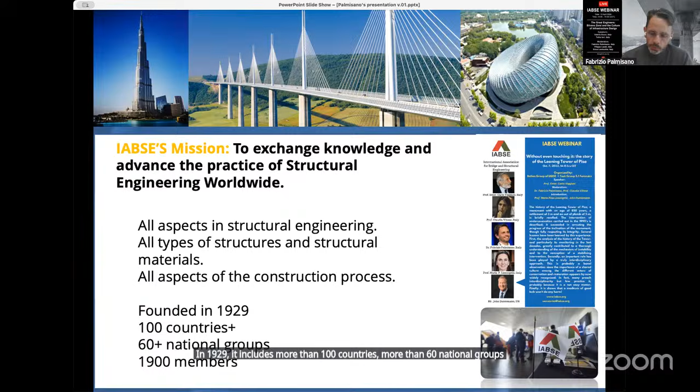The IABSE mission is to exchange knowledge and advance the practice of structural engineering worldwide. It covers all aspects in structural engineering, all types of structures and structural material, all aspects of the construction process. It was founded in 1929. It includes more than 100 countries, more than 60 national groups, and almost 2,000 members. The objectives are to promote cooperation and understanding among all those concerned with structural engineering and related fields by worldwide exchange of knowledge and experience, to encourage awareness and responsibility of structural engineers towards societal needs, to encourage action necessary for progress in structural engineering, and to improve and foster cooperation between organizations having similar objects.

The core, I would say, of the IABSE are the national groups, who are very active and give people and experts for all the IABSE activities. The Italian group of IABSE is new because it has been refounded almost 3 years ago. The basic activities are technical task groups to discuss specific topics, dissemination activities, for example papers in Structural Engineering International, the journal of IABSE, IABSE bulletins, workshops, special sessions at IABSE conferences, and also training activities. We have organized, as today, some webinars. We aim also to organize some short courses. We have already organized one conference in Milan 2 years ago, and we are also planning to organize a huge conference in Milan in 2027.

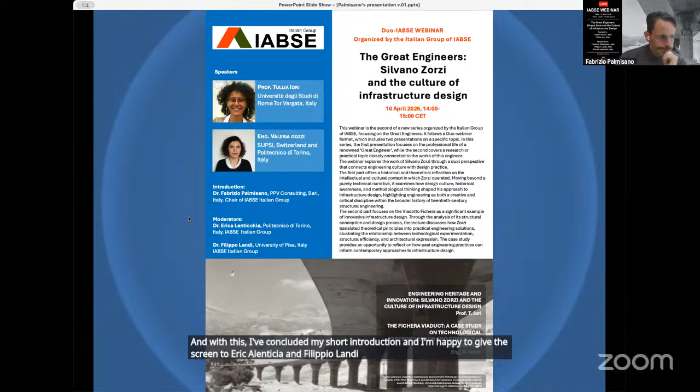Good afternoon, and welcome also from my side. As Fabrizio told you, today our focus is on Silvano Zorzi, a great engineer of the 20th century, through a dual perspective that connects engineering culture with the design practice. To guide us through this dual perspective, we are joined by two prominent speakers, engineer Valeria Gozzi and Professor Tullia Iori. We are honored to have them with us.

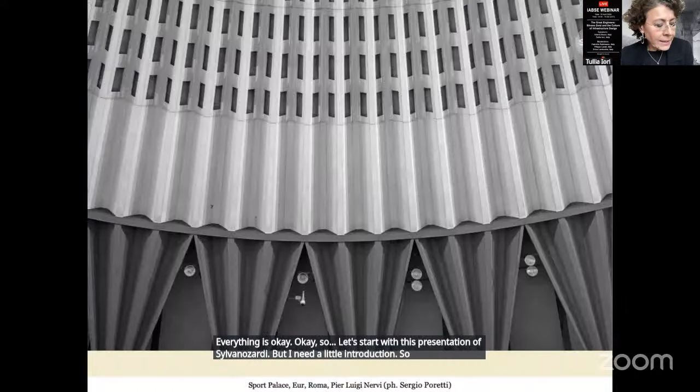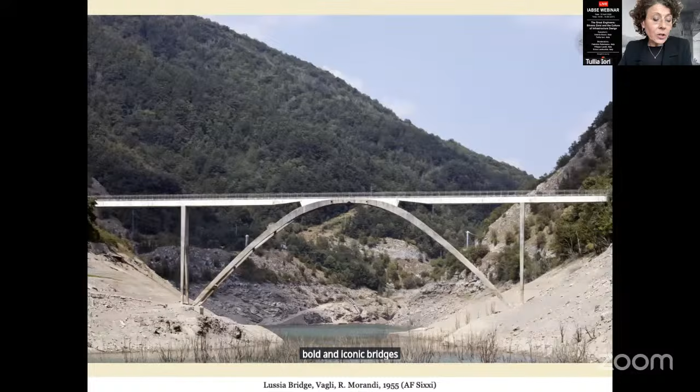So let's start with this presentation of Silvano Zorzi, but I need a little introduction. At the beginning of the 1960s, the Italian School of Engineering was at the height of its success. Represented by designers such as Pier Luigi Nervi and Riccardo Morandi, it was recognized worldwide as a benchmark. Nervi's domes, classically beautiful, yet built with just a few centimeters of ferrocement, or Morandi's bold and iconic bridges, were featured in international technical journals and showcased in the famous 1964 New York exhibition dedicated to 20th century engineering, which was full of Italian works.

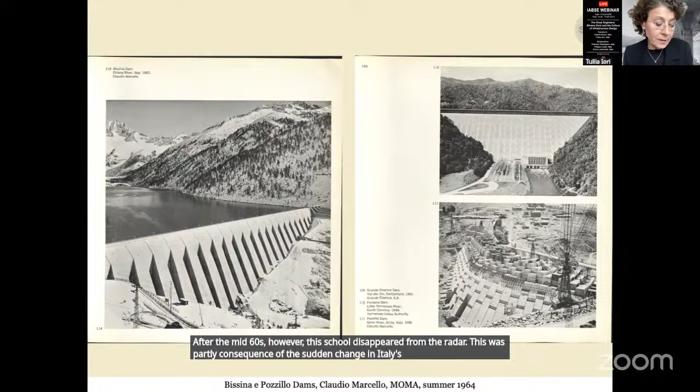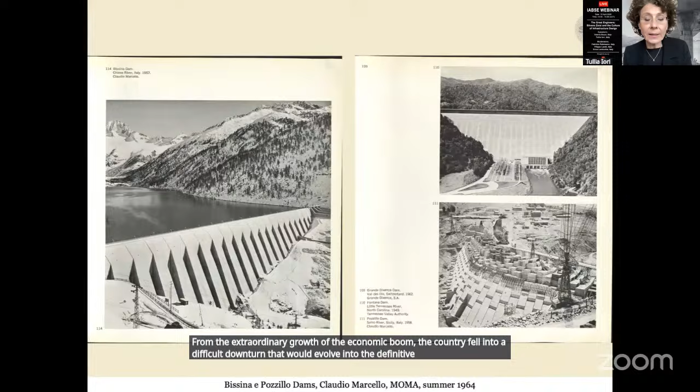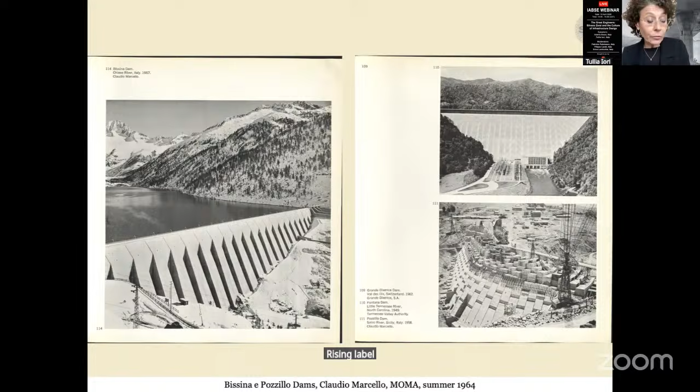After the mid-60s, however, this school disappeared from the radar. This was partly a consequence of the sudden change in Italy's productive conditions. From the extraordinary growth of the economic boom, the country fell into a difficult downturn that would evolve into the definitive crisis of the 1970s. It was also the result of a broader transformation in the civil engineering sector. Rising labor costs, the advent of computing, changes in calculation tools, and increasing specialization led to the extinction of the classical figure of the large structure designer, which had survived in Italy's proto-industrial context.

From that moment on, even in Italy, bridges and large span structures would no longer be the individual work of a single author, but rather the depersonalized product of multidisciplinary teams and standardized construction systems. Yet, even in its rapid and irreversible decline, the Italian School of Engineering left behind across the country a trail of posthumous masterpieces. Among these are the mature works of Silvano Zorzi, who, after playing a leading role in the epic years of post-war reconstruction, remained one of the few to resist the extinction.

How? By refusing to passively accept the leveling effect of specialization and prefabrication, by reworking innovative construction systems for Italian building sites, and by redeeming the simplification of structural schemes imposed by the changing production panorama through the quality of design. It was a kind of utopia, yet one capable of generating structural architectures of extraordinary quality.

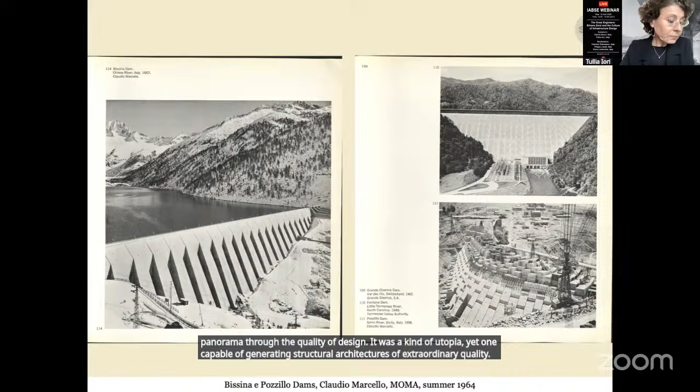Silvano Zorzi was one of the protagonists of 20th century Italian engineering alongside Pier Luigi Nervi, Morandi and Musmeci. A leading expert in prestressed reinforced concrete, he left behind a remarkable legacy of beautiful bridges throughout Italy. Zorzi was born in 1921. Nervi had been born 30 years earlier and Morandi nearly 20. These differences matter.

Zorzi worked entirely in the post-war period, actively participated in reconstruction, and rose to prominence during the economic boom. When the crisis arrived, he had to confront it directly. He was still young, and while the older engineers leveraged their careers abroad, Zorzi had to find a way to continue designing his masterpieces within Italy.

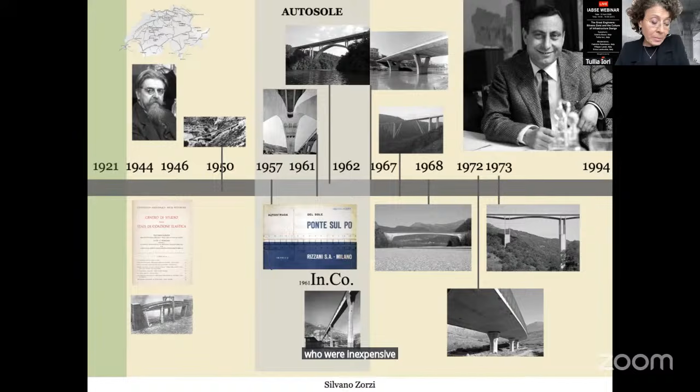These masterpieces were created in a rapidly changing world of labor. At the beginning of his career, construction sites were full of workers who were inexpensive and needed employment. Public works also served to combat unemployment. These were labor-intensive sites with little machinery or technological equipment.

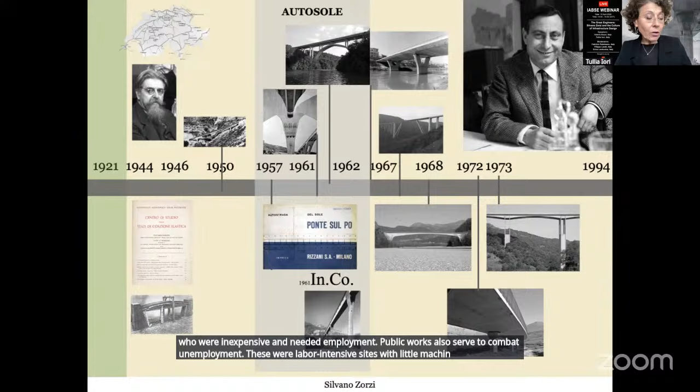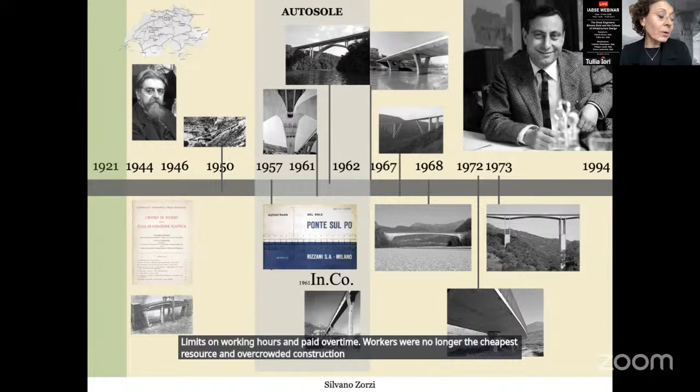From the mid-60s onward, however, labor costs rose rapidly. Trade union demands led the state to introduce pensions, paid holidays, protection for illness and accidents, formal labor contracts, limits on working hours, and paid overtime. Workers were no longer the cheapest resource, and overcrowded construction sites were no longer economically viable. As a result, construction in Italy, especially for large structures, changed, embracing industrialization.

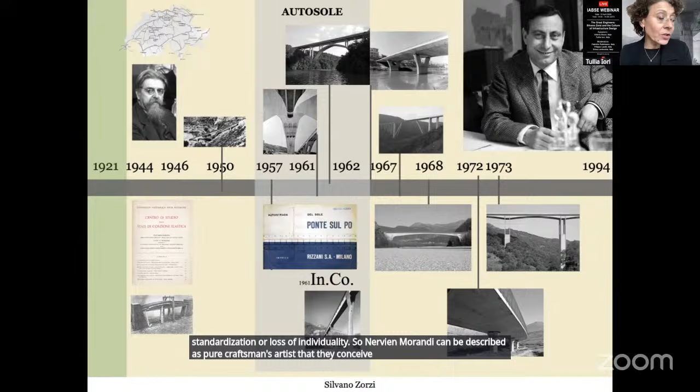Zorzi, however, never abandoned the identity of the Italian school or the originality of his structural language. His was an Italian-style industrialization without standardization or loss of individuality. So, Nervi and Morandi can be described as pure craftsmen, artists. They conceived their structures as large-scale sculptures, unique and unrepeatable.

Zorzi, by contrast, was an industrial designer. He worked like those who design tables, chairs, lamps, and bookcases for industrial production. And this is not surprising. A bridge is more like a table than a house. It's a functional object. Zorzi was the structural designer of Made in Italy, part of that legendary group of industrial designers who from Milan in the 70s rose to global prominence.

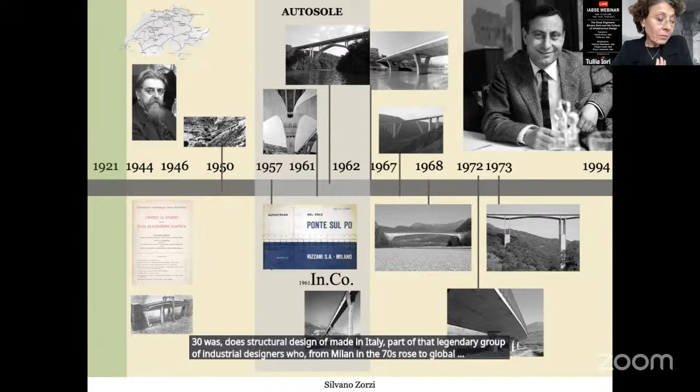Zorzi's beginnings were not easy. In 1939, he enrolled in engineering at the University of Padua, but with the outbreak of World War II, he was forced to abandon his studies. After the armistice of September 8, 1943, he fled to Switzerland to avoid both collaboration with the Fascist Republic of Salò and deportation to Germany. His escape was dramatic. He fell into a ravine, contracted septicemia, but eventually managed to cross the border.

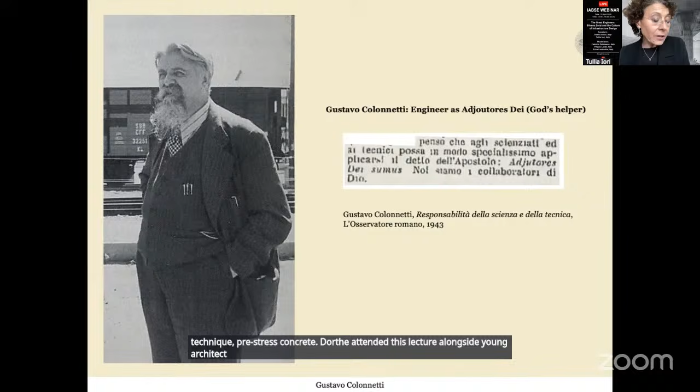In exile, a decisive encounter changed his life. He met Gustavo Colonnetti, also in Switzerland, a renowned anti-fascist and professor of structural mechanics at the Politecnico of Turin. Colonnetti organized university internment camps for refugee students, where he personally taught engineering courses focusing on an innovative technique, pre-stressed concrete. Zorzi attended these lectures alongside young architects and future leading figures in the Milanese industrial design world, such as Vico Magistretti and Angelo Mangiarotti, as well as Ernesto Nathan Rogers and Aldo Favini. They instilled in him a passion for the design of functional objects.

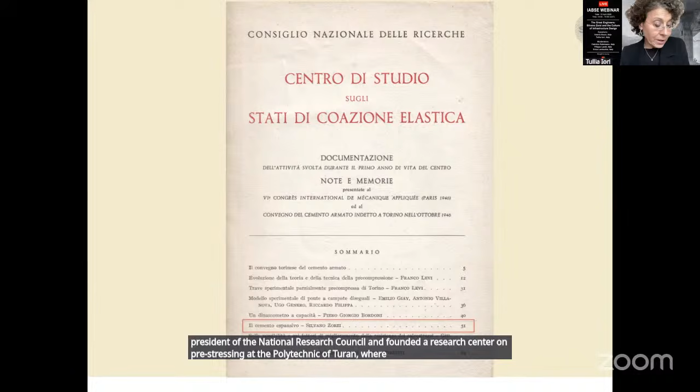Zorzi completed his exams in Switzerland, later recognized by the University of Padua as if he was in Erasmus. After the war, Colonnetti became president of the National Research Council and founded a research center on pre-stressing at the Politecnico of Turin, where Zorzi briefly worked. But he was not suited to laboratory research. He soon left to dedicate himself to bridge design. This Swiss experience shaped him permanently. Pre-stressed concrete and industrial design became the foundation of his thinking.

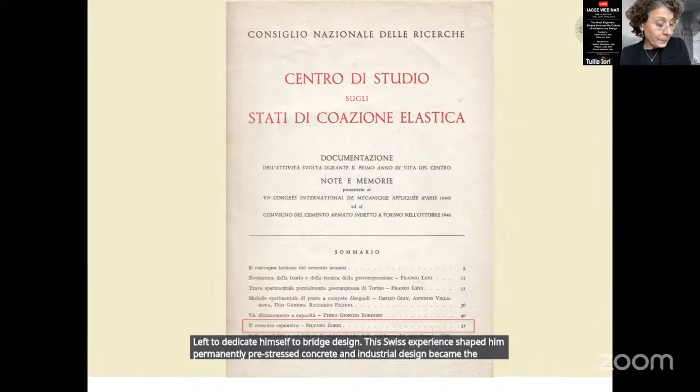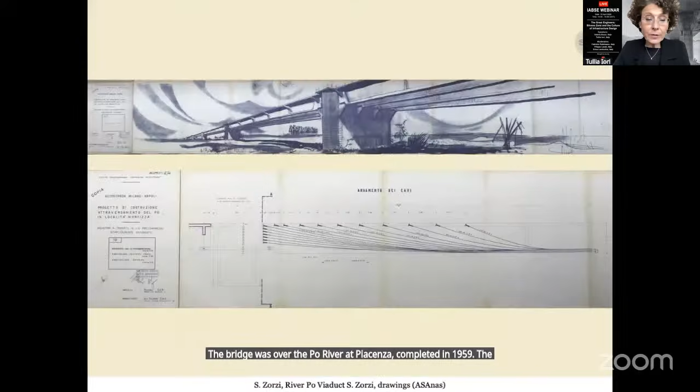Already in 1950, he designed one of the first pre-stressed concrete bridges in the world for the Mucone hydroelectric plant in Calabria. Shortly afterward, he opened his own design firm in Milan, later named INCO, Ingegneri Consulenti, Consultant Engineers. His first major opportunity came when, at age 35, he won the competition for a key bridge on the most important highway in Italy, the Autostrada del Sole, the Sun Highway. The bridge was over the Po River at Piacenza, completed in 1959. The bridge is a very simple structure, 16 pre-stressed concrete beams, simply supported on piers spaced 75 meters apart.

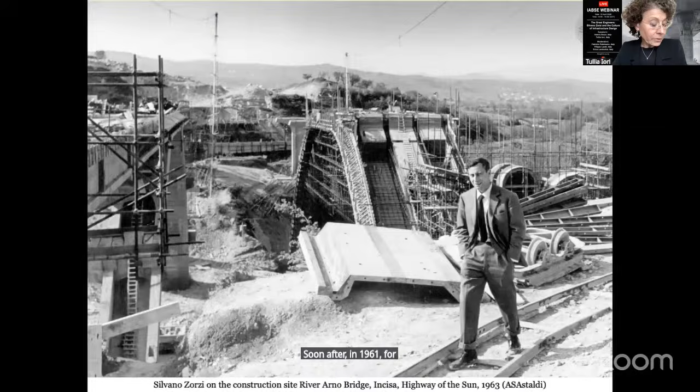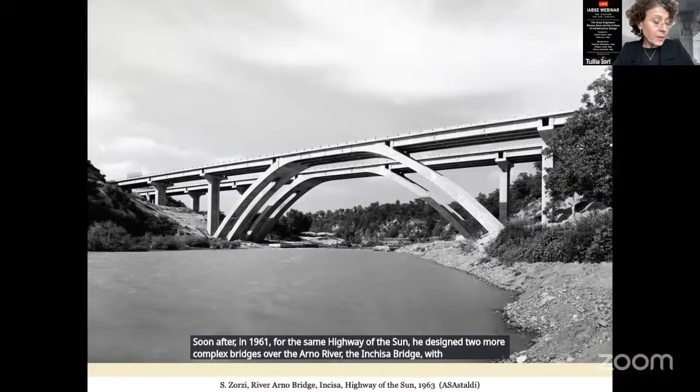Soon after, in 1961, for the same Highway of the Sun, he designed two more complex bridges over the Arno River, the Incisa Bridge, with twin pre-stressed concrete arch portals spanning 104 meters, and the Levane Bridge, a 134-meter polygonal arch, both built with a tubular scaffolding called Innocenti scaffolding.

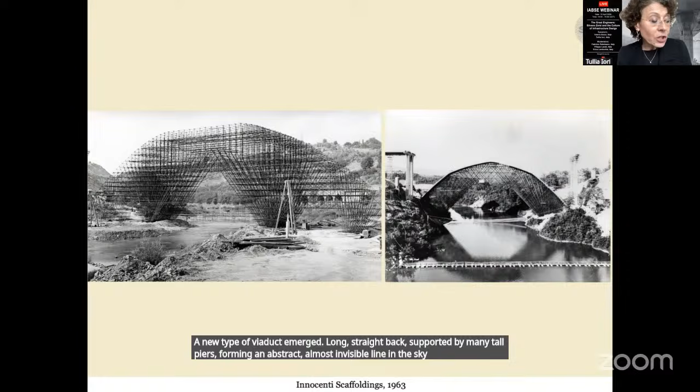The era of large arch bridges in Italy ended after the completion of the Highway of the Sun. After 1964, no such bridges were built for decades. New seismic regulations discouraged trussed structures like arches. Landscape authorities considered them too intrusive, and the cost of temporary scaffolding had become prohibitive. A new type of viaduct emerged, long straight decks supported by many tall piers, forming an abstract, almost invisible line in the sky. Zorzi initially, in fact, continued to design unique bridges.

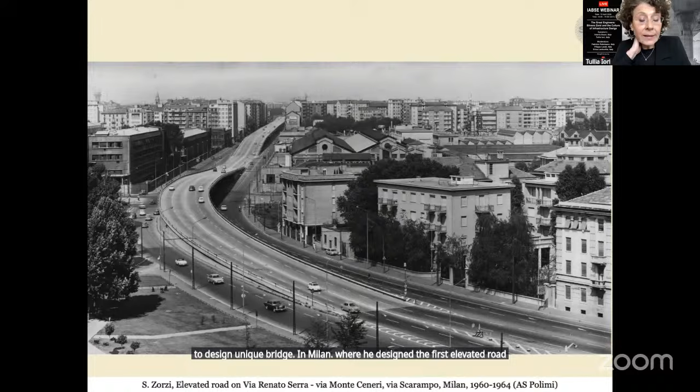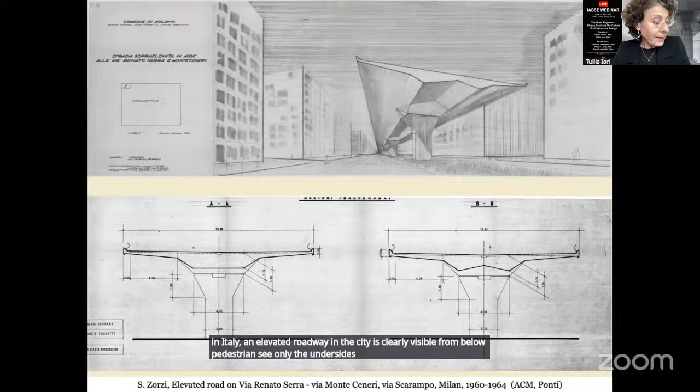In Milan, he designed the first elevated roadway in Italy. An elevated roadway in the city, he said, is clearly visible from below. Pedestrians see only the underside of the deck. Therefore, this underside must be carefully designed, because it effectively becomes a kind of canopy for those walking beneath it.

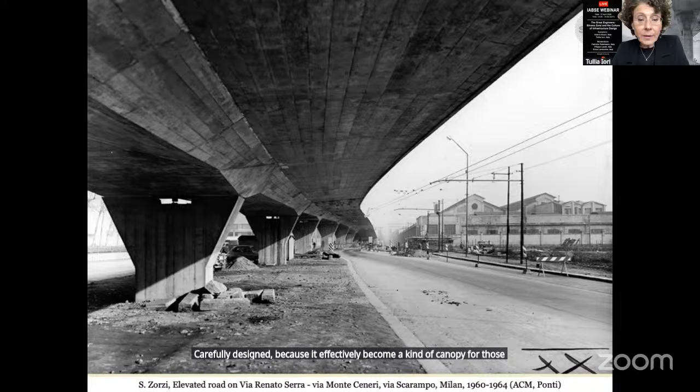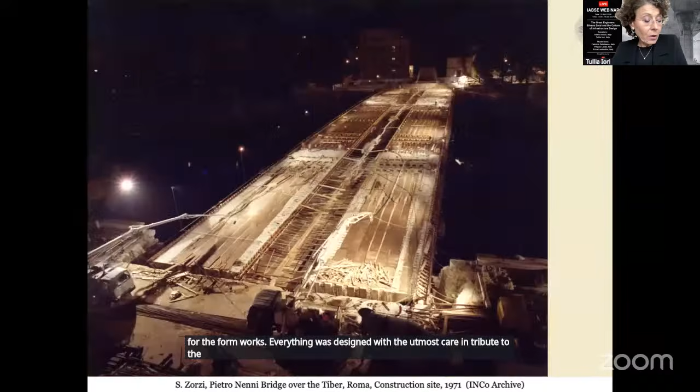In Rome, he designed the bridge carrying the metro line over the Tiber near Piazza del Popolo, completed in 1972. Slender bifurcated piers support a gently curved deck, echoing the Baroque form of the city. White concrete for the piers, marine wood for the formworks. Everything was designed with the utmost care in tribute to the capital and its historic river.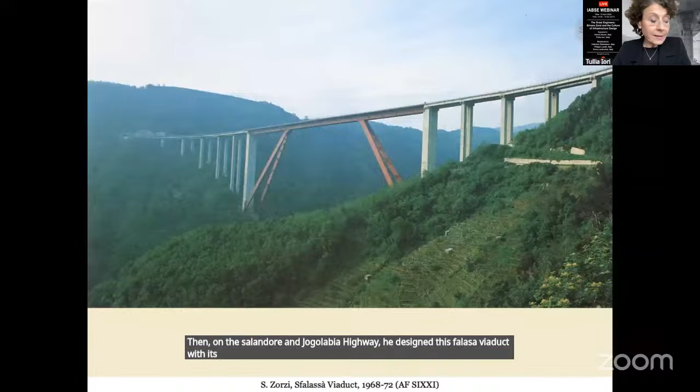Then, on the Salerno-Reggio Calabria highway, he designed the Sfalassa viaduct with its innovative inclined strut portal system in steel. The struts were first constructed vertically and then rotated into position on site using a mechanical system. In this way, temporary supports were not required.

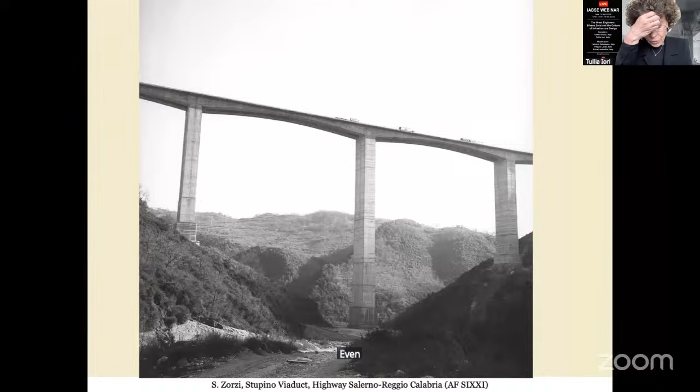But in the end, he too adopted the new typology of bridge: long, straight decks supported by many tall piers. Even with these constraints, Zorzi created masterpieces. He rationalized construction without abandoning cast-in-place concrete. He disliked prefabrication and instead invented a moving construction system that advanced along the bridge. He introduced two key machines in Italy adapted from German technology.

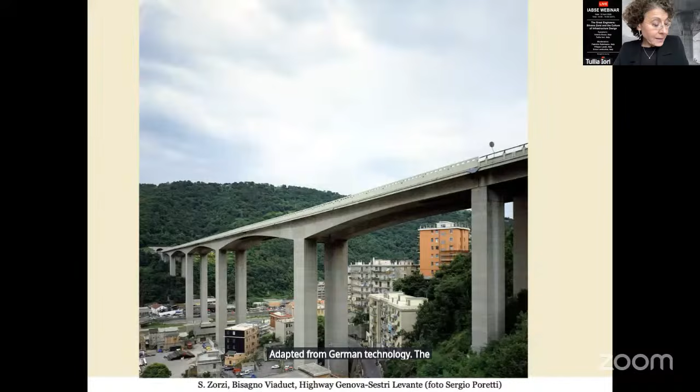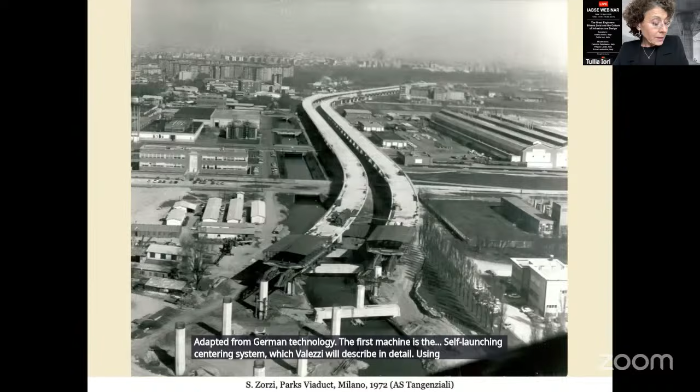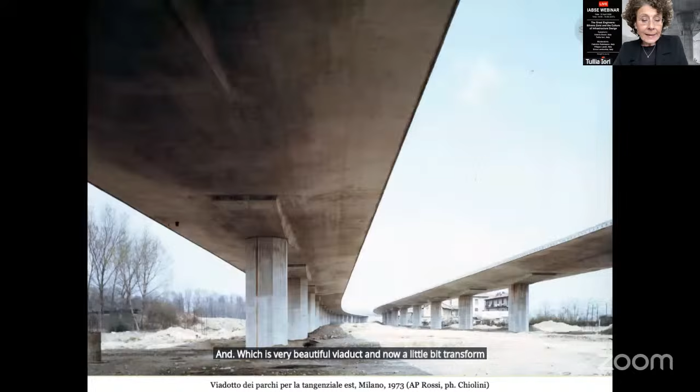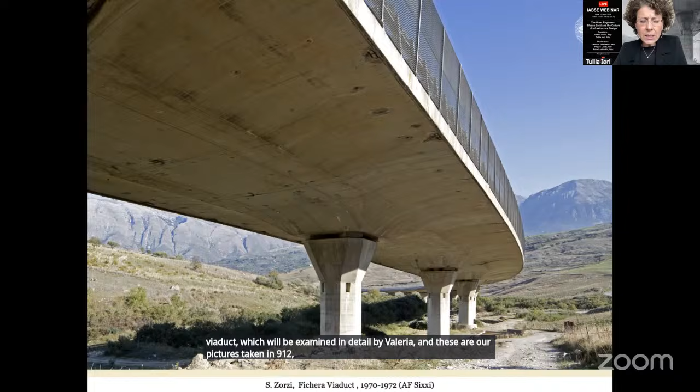The first machine is the self-launching centering system, which Valeria Gozzi will describe in detail. Using this machine, Zorzi built very long viaducts, such as the Parchi Viaduct east of Milan, which is a very beautiful viaduct, now a little bit transformed. And this is Zorzi under the bridge, a beautiful object of design, and the Fichera Viaduct, which will be examined in detail by Valeria. These are our pictures taken in 2015.

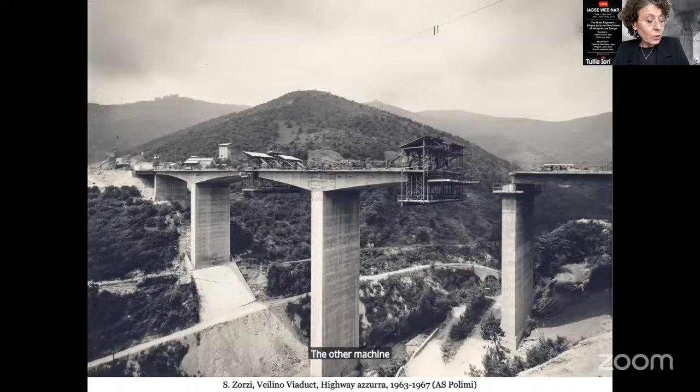The other machine that Zorzi introduced to Italy is the movable form traveller for incremental and step-by-step construction. This machine was used to build a viaduct starting from the top of the pier and proceeding in cantilever. The device extended outward, allowing the construction of a segment of the deck, about 4 meters long, also in cantilever. To avoid deforming the pier, the deck was built symmetrically on both sides. Construction advanced little by little until the two cantilevers eventually met.

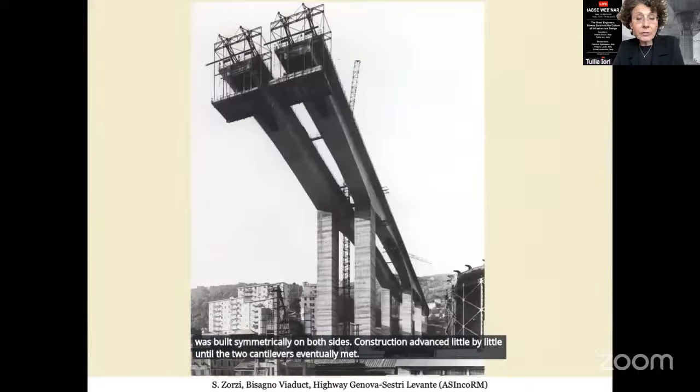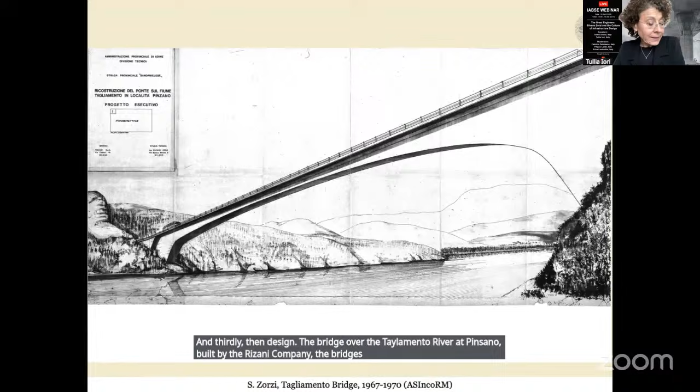Zorzi first adopted the equipment in 1967 for a series of viaducts along the Blue Highway, the Autostrada Azzurra in Liguria from Genoa to Sestri Levante. Zorzi then designed the bridge over the Tagliamento River at Pinzano, built by the Rizzani company. The bridge has a span of 163 meters and consists of a three-hinged portal frame in pre-stressed reinforced concrete.

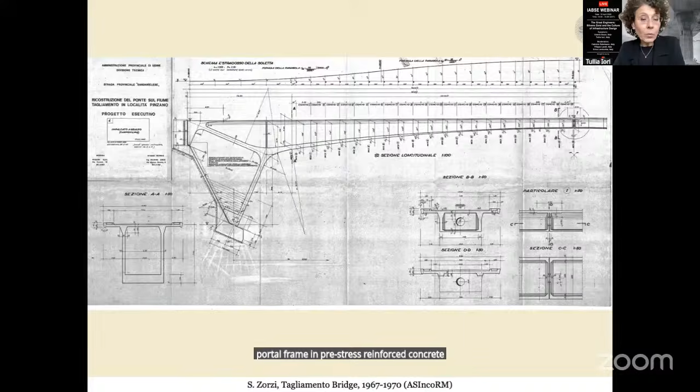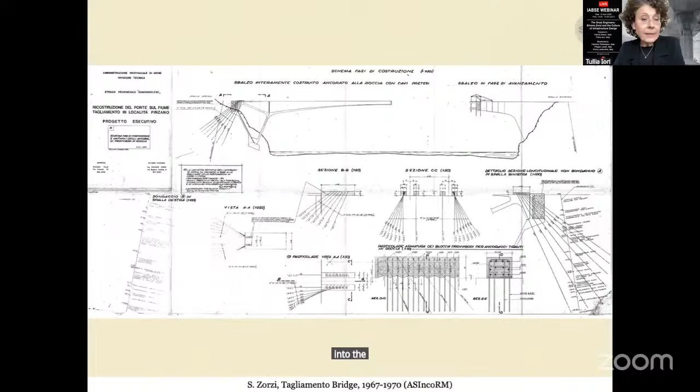The structure was built in cantilever from both banks. The hinges at the abutments were temporarily locked by inserting deep anchor rods into the rock. Segment by segment, the two cantilevers advanced until they met at the crown without bending, thanks to temporary pre-stressing.

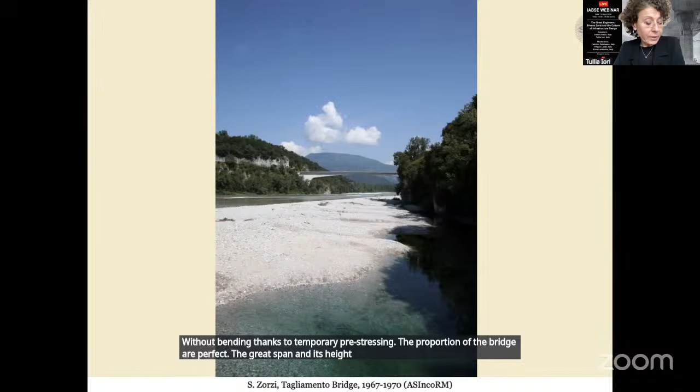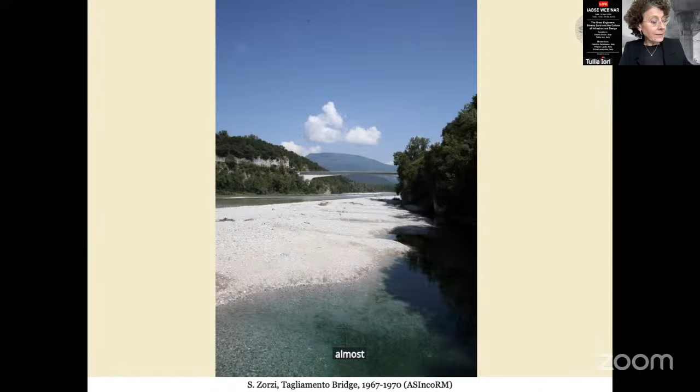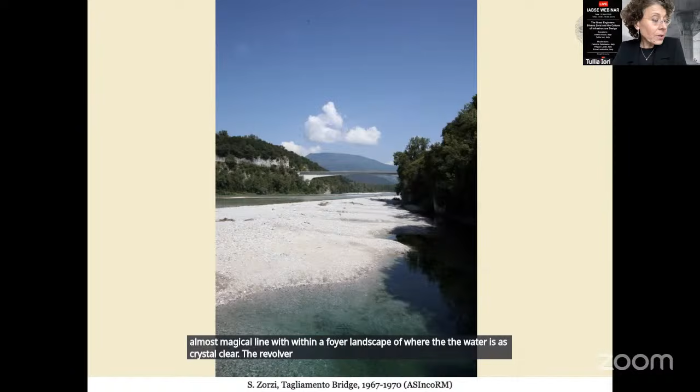The proportions of the bridge are perfect. The great span and its height above the water detach the structure from any direct relationship with human scale. The bridge appears as a slender, almost magical line within a fairy tale landscape where the water is crystal clear, the riverbed has a pinkish hue, and the Dolomites rise in the background.

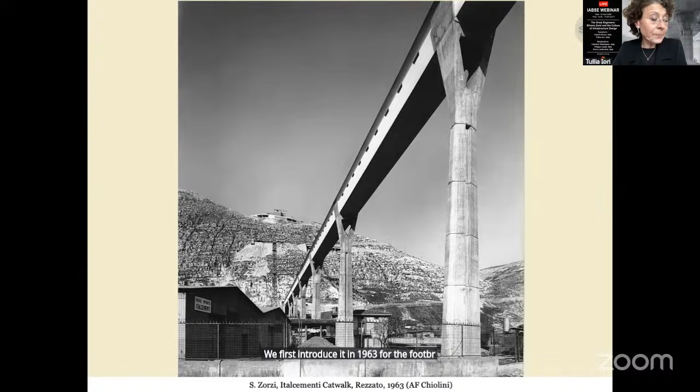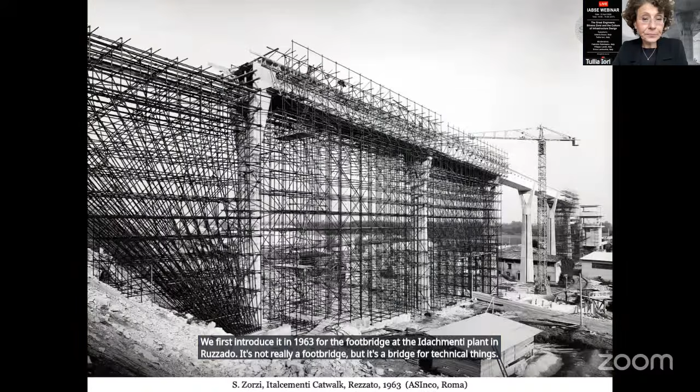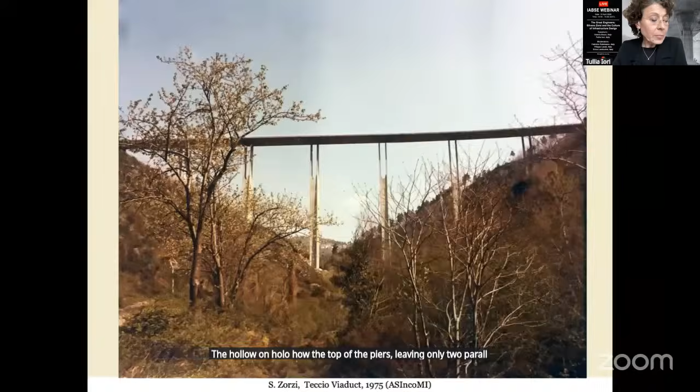In designing bridges with very tall piers, Zorzi also developed an original structural solution, the tuning fork piers. He first introduced it in 1963 for the footbridge at the Italcementi plant in Rezzato. It's not really a footbridge, but a bridge for technical things. This is another industrial design object, and later he refined it in the Gorzexio and Teccio viaducts in Liguria. Zorzi hollowed out the top of the piers, leaving only two parallel blades. The piers resemble a tuning fork.

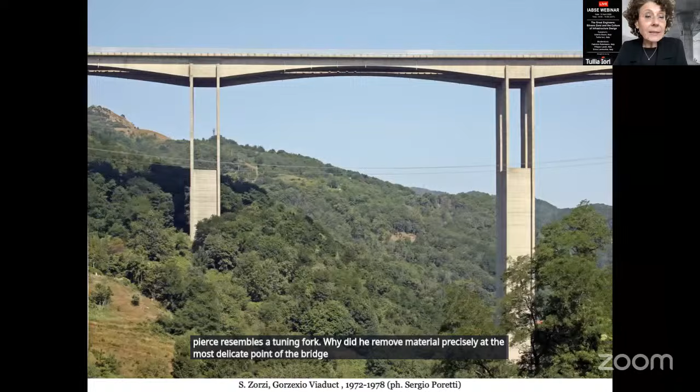Why did he remove material precisely at the most delicate point of the bridge, where the piers meet the deck? There are at least two good reasons. Normally, piers are spaced at regular intervals, but the valley floor continuously changes elevation. As a result, piers have different heights and therefore different structural behaviors. A tall, slender pier behaves differently from a short, stocky one.

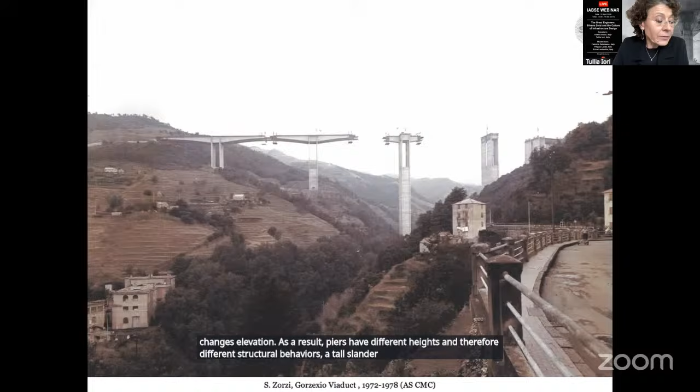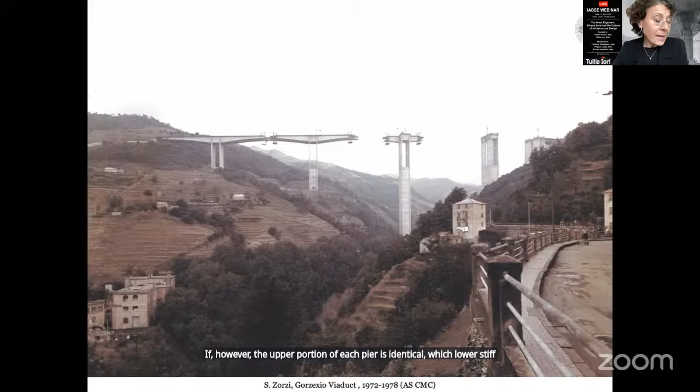If, however, the upper portion of each pier is identical, with lower stiffness than the base, the viaduct behaves as if it effectively begins at that level. The lower part simply acts as a foundation. In this way, Zorzi achieved a more uniform distribution of stresses across all the piers, making them structurally equivalent.

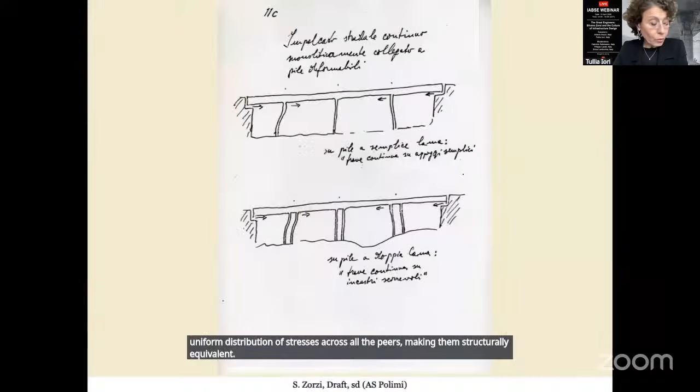But that is not all. The tuning fork shape accommodates horizontal forces, allowing the structure to absorb thermal expansion and braking forces. In these viaducts, expansion joints in the deck are no longer necessary, resulting in significant cost savings and a smoother ride for motorists, who no longer experience jolts at every joint.

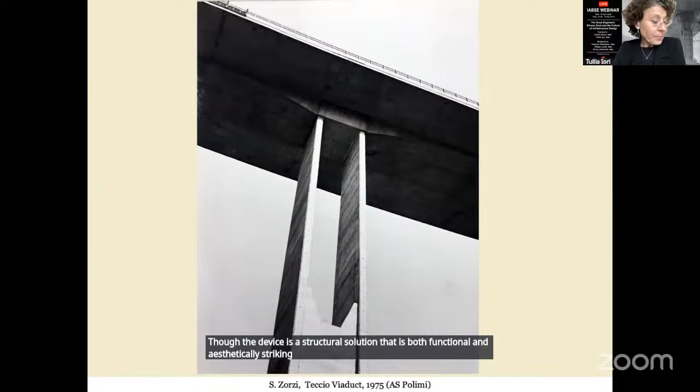Zorzi devised a structural solution that is both functional and aesthetically striking. The pier becomes transparent at the top, the deck appears even lighter, and the bridge becomes a large-scale design object. Despite his efforts, by the mid-70s, Italian engineering entered an irreversible crisis.

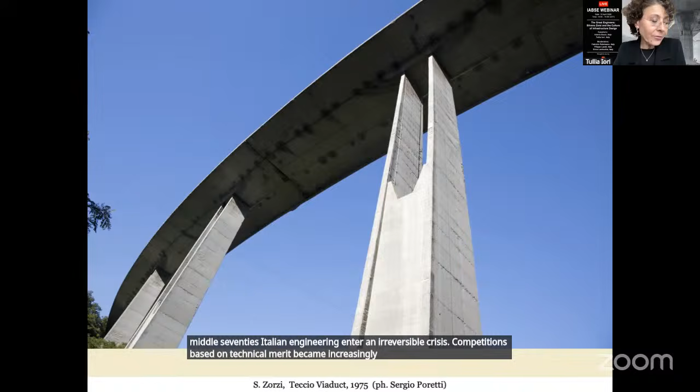Competitions based on technical merit became increasingly rare, and Zorzi often complained about this new climate. He continued working stubbornly until the late 80s. After falling ill, he passed away on March 13, 1994. Zorzi left behind him a legacy of structural design works across Italy, an extraordinary heritage that deserves to be preserved.

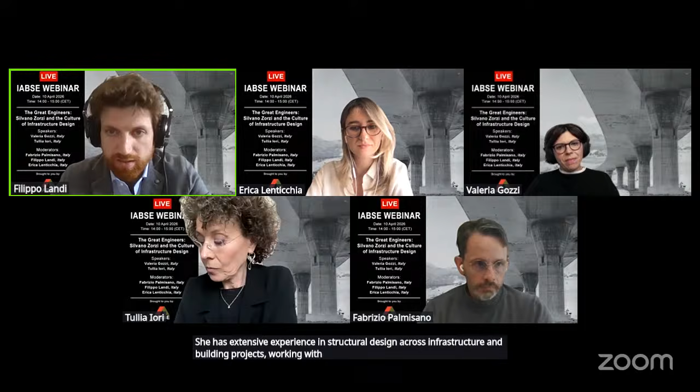She is a civil engineer, owner of the engineering firm Zanini Gozzi in Lugano, in Switzerland. She graduated from the Politecnico of Turin in 2006 and is currently completing a PhD at the same university. She has extensive experience in structural design across infrastructure and building projects, working with concrete, steel, and timber structures, as well as in seismic assessment and geotechnical engineering.

Together with professional practice, she's also active in academia, teaching at the University of Applied Sciences and Arts of Southern Switzerland, SUPSI, and contributing to research, publication, and editorial projects. She also collaborates with the journal Espazium as an author and editor. Her work focuses on the responsible and sustainable approach to construction with a focus on reuse, circular economy, and cultural value of the built environment. So please, Valeria, the floor is yours.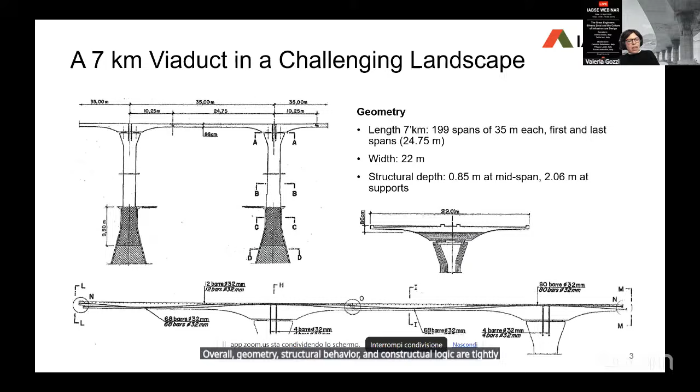As a result, as already said, the deck behaves almost as a single continuous element, improving both structural efficiency and durability. This continuity also allows the deck to act as a horizontal bracing system for the sequence of piers. So the deck is not only a load-bearing element, but also plays a key role in the global stability of the structure. Overall, geometry, structural behavior, and construction logic are tightly connected and already point towards the importance of the construction process. But to fully understand the design choices, we need to look at the ground conditions.

As shown on the left side of this slide, in these original photos, the area is characterized by highly unstable soils, mainly composed of disturbed tertiary flysch formations. These slopes are prone to continued landslide activity, with movements that can affect large portions of the terrain. So this is not a static condition and not the ideal condition for a new design, but a dynamic and evolving landscape.

What is particularly relevant is that this instability is still active today. In fact, a landslide, as you can see in this picture, occurred this year at the beginning of 2026, confirming that the conditions observed during the construction are still present. Here, a landslide in Polizzi Generosa. So the project has had to deal not only with difficult terrain, but also with long-term instability.

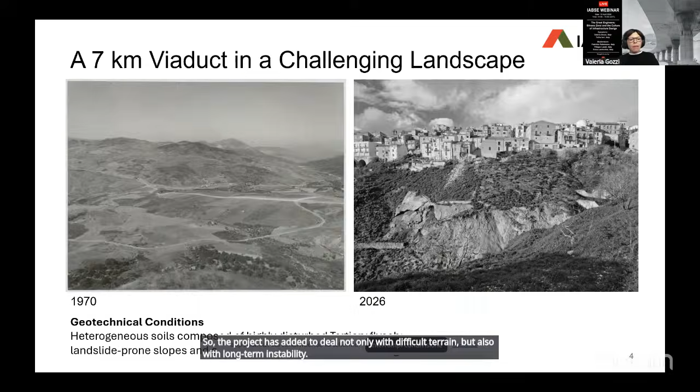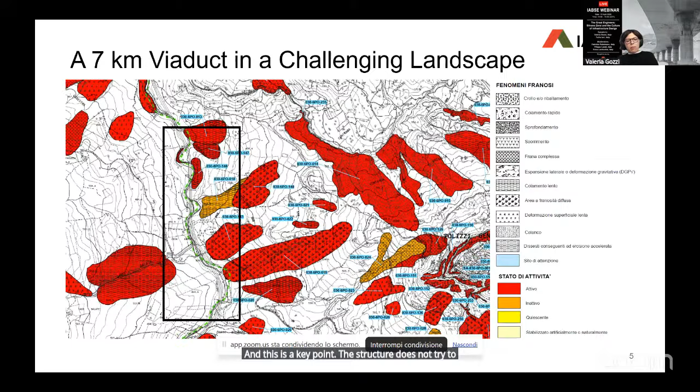At first glance, one might expect the structure to avoid this area, but Zorzi does exactly the opposite. Instead of placing the foundation on unstable slopes, the piers are located along the riverbed, where the ground conditions are more stable due to the mutual constraint of opposite movements. So the riverbed is not seen as a constraint, but as the only possible line of stability. In this way, the position of the piers is not only a geometric or hydraulic choice, but a direct response to the geotechnical condition. And this is a key point. The structure does not try to resist the terrain, but rather adapts to its behavior.

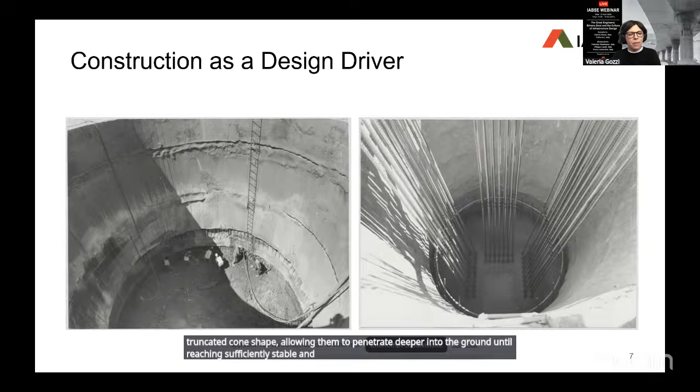Here, some photos from the foundation. Given the hydrogeological condition we have seen, the foundation system is designed to reach stable ground layers. The foundation consists of a series of deep foundation wells aligned along the axis of the deck. These wells are enlarged with a truncated cone shape, allowing them to penetrate deeper into the ground until reaching a sufficiently stable and resistant layer. Above them, piers rise as relatively slender elements with an octagonal section and reduced footprint.

At the same time, vertical pre-stressing can be seen here. It is introduced both in the foundation wells and in the piers. This is intended to improve the structural response to shear forces and bending moments, especially those induced by possible ground movements. So the foundation system is not only designed to carry vertical loads, but also to respond to an unstable and evolving ground condition.

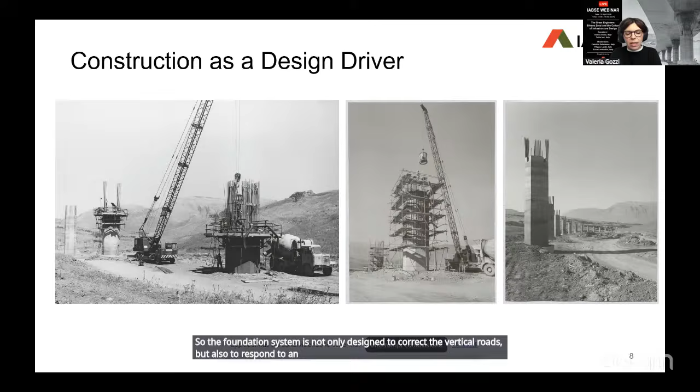At the top of the piers, the geometry changes significantly. The piers widen into mushroom-shaped capitals, which provide a larger surface for load transfer from the deck. The deck is not rigidly connected to the piers. Instead, it rests on neoprene bearings, which allow controlled movements and accommodate thermal effects and deformation. So the connection between deck and pier is not fixed, but intentionally flexible. This avoids stress concentration and allows the structure to adapt to both structural and ground movements.

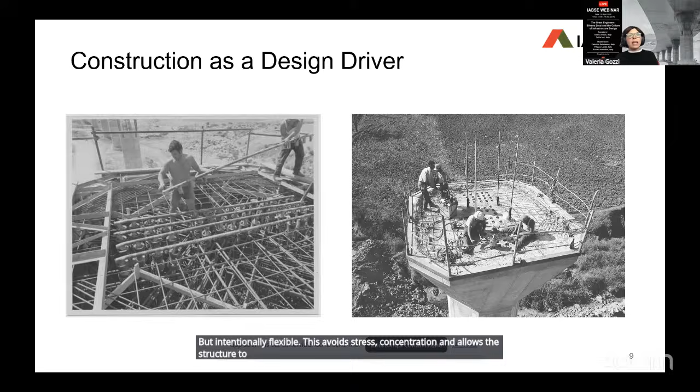Here, the 4 neoprene bearings. The decks rest on 4 reinforced neoprene bearings arranged at the corners of a square. Within this square, the resultant of vertical loads always falls, ensuring a stable and controlled transmission of forces. This creates a connection that, as I said, is not rigid, but able to behave as a sort of frame between deck and piers.

What is particularly interesting, in my point of view, is that the system is also designed to allow future adjustment. In fact, in case of foundation settlement, the structure can be re-leveled by inserting flat jacks in this position between the piers and the deck. So the connection is not only flexible, but also adaptable over time. In this picture, we see an original image of how Zorzi built the deck.

As already anticipated by Professor Tullia Iori, Zorzi was not only a structural engineer, but also a technologist, as we can say today, and a builder. For him, construction was never a secondary phase, but something strictly connected to the structural system and to the form of the project itself. Bridge construction can rely on different methods, as the Professor cited before: traditional casting in place, prefabrication, balanced cantilever construction, each suitable for specific conditions.

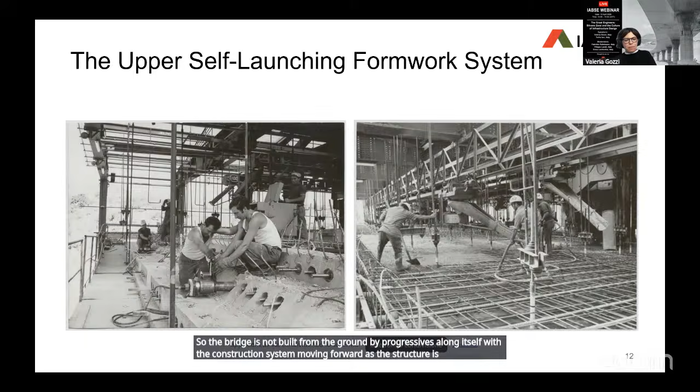So, to conclude, what the Viadotto Fichera really demonstrates, from my point of view, is that for Zorzi, design is never just about structure, but about bringing together landscape, structural logic, form, and construction strategies into a single coherent system. The geometry is never arbitrary, but driven by efficiency. The structure is not isolated, but embedded in the territory. And construction is not a phase that comes later, but something that shapes the project from the beginning. In this sense, Zorzi's works remain deeply contemporary, a forward-thinking and truly multidisciplinary approach to engineering.

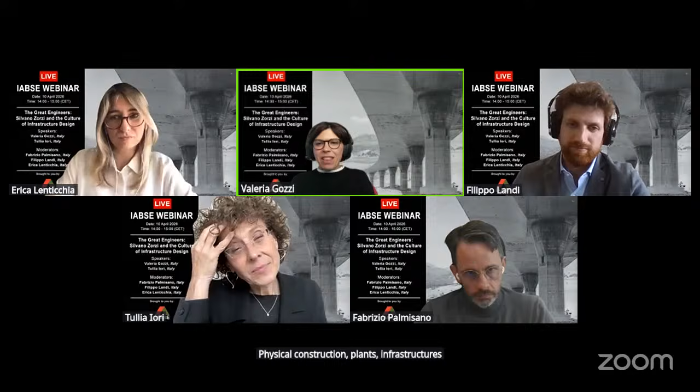From now? Maybe it could be interesting to focus on someone who faced buildings, since you have done two infrastructure engineers. Buildings is a very hot topic, because today you have to deal with many interfaces that in the past they didn't have. Physical construction, plants, infrastructures, and everything that now is very difficult.

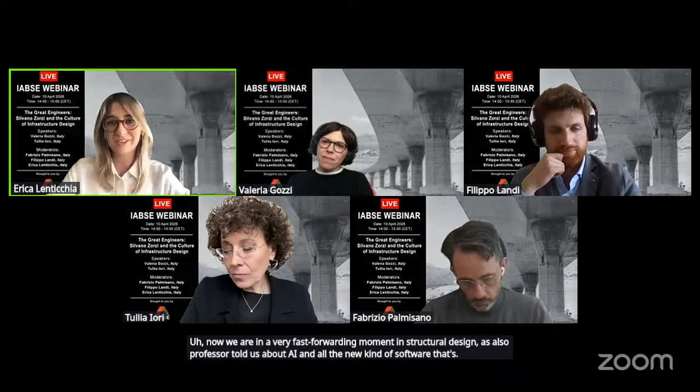I just wanted to go back to what Professor Iori told us about being an engineer of our time. Now we are in a very fast-forwarding moment in structural design, as the Professor told us, with AI and all the new kinds of software that are starting to be used, and maybe we will need to take them into account. So finding the zeitgeist of our time can be challenging, but as structural engineers and as designers, we can take this challenge and go on, in my opinion. So it can be quite interesting to focus on it.

Just a quick question, maybe it's more a curiosity. Maybe for Professor Iori: what is, according to you, the most iconic bridge by Zorzi? I mean, the one that best represents his vision, and why? If there is only one, I don't know.

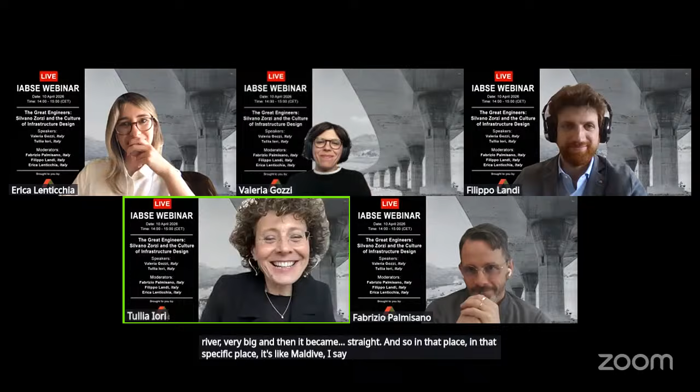I love a lot of bridges by Zorzi. The most beautiful, I think, is the Tagliamento Bridge, because it is in a very spectacular place. You can't imagine that the Tagliamento is so beautiful, because the Tagliamento River is a strange river, very big, and then it becomes straight, and in that specific place it's like the Maldives, I say. The water is so transparent, and the sand is pink, because of the Dolomites rock.

And near the Tagliamento Bridge there is a place called San Daniele, and in San Daniele they produce ham, and it's fantastic. So you have to buy a ham sandwich, then go there and take pictures of the bridge with your feet in the water, which is cold like the ocean, and this is a mystic experience. So we pass from salami at the Fichera Bridge to ham at the Tagliamento. The bridge has a flavor.

It's complicated to say in English, because the words don't carry the same meaning. But yes, I wrote a paper called The Taste of the Bridges. Okay. So a bridge is not only something to be lived, but something to be tasted.

And another curiosity for Valeria, about the Fichera Viaduct. What is the main lesson that young engineers can learn from this viaduct? The main lesson, from my point of view, is that when you face a difficult site, you have to see the opportunities and not consider them as constraints, because we are engineers and we solve problems, and we can choose how to solve the problem, and very often the easier solution is also the most efficient. So we need to be brave and not scared of our profession. There are challenges to be overcome by an engineer.